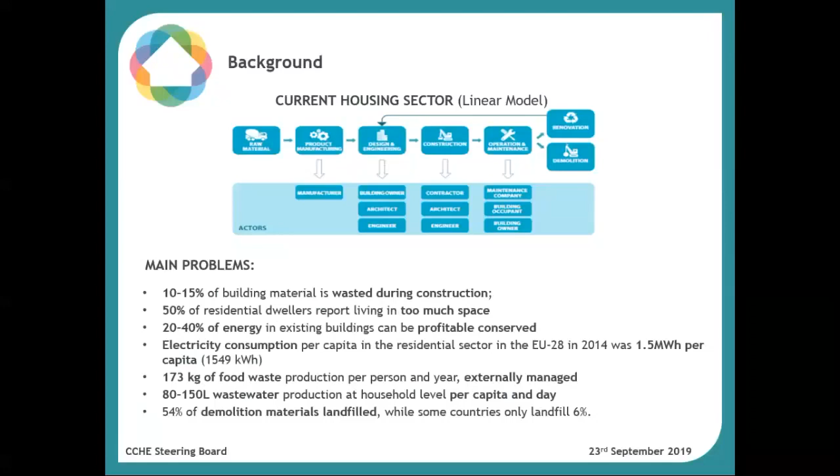For that, HOUSEFUL offers an integrated solution called the HOUSEFUL service, composed of 11 circular solutions co-created by the stakeholders in the current housing value chain.

Co-creation is a very important word in this project because the communication flow goes from one stakeholder to the other in both directions. Co-creation, I think, is the most important part of the project.

The HOUSEFUL service aids the circular management and efficient use of the different vectors such as waste, water, energy, and materials for all the stages of the European buildings' life cycle.

Once these solutions are developed and offered to society as a service, they will be presented as an online software as a service, enabling the replication of these solutions offered to stakeholders as circular economy business opportunities.

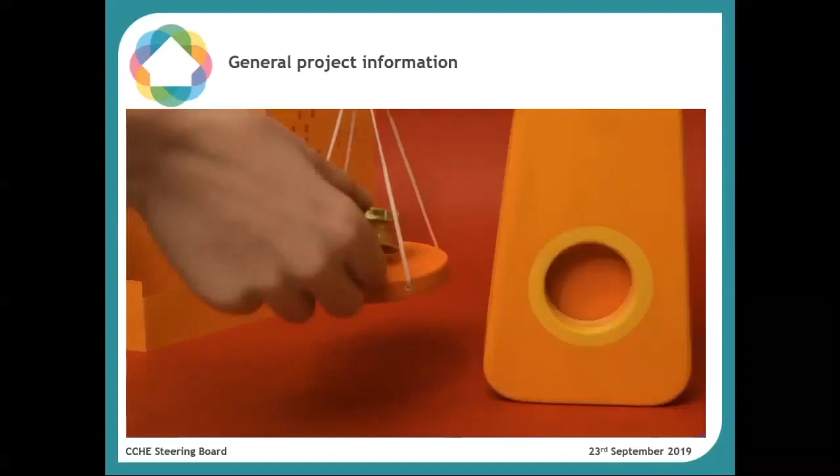Buildings are essential in our lives. They are the places where we live, work, and spend part of our free time. No wonder the housing sector generates 9% of Europe's GDP. However, it is absorbing 50% of Europe's extracted materials, 40% of its available energy, and 30% of its available water, in addition to producing 30% of our total waste and 35% of our greenhouse gas emissions.

Radical actions are needed to preserve the environment by turning the current linear approach to a circular and sustainable one. The EU-funded HOUSEFUL project embraces this challenge by recovering food waste at home level, reducing waste destined to landfills, reusing rain, grey and black water, and fostering the adoption of renewable energy.

Overall, this approach will decrease CO2 emissions by 60%. Imagine? By combining HOUSEFUL's 11 solutions, we'll have the chance to manage our materials, waste, water, and energy in buildings at a circular and holistic level. These will be tested in 4 demo sites, Vienna and nearby Barcelona, and will be adopted later in Europe and beyond to make the housing sector more sustainable, therefore protecting our environment.

Keen to know more about HOUSEFUL? Visit houseful.eu.

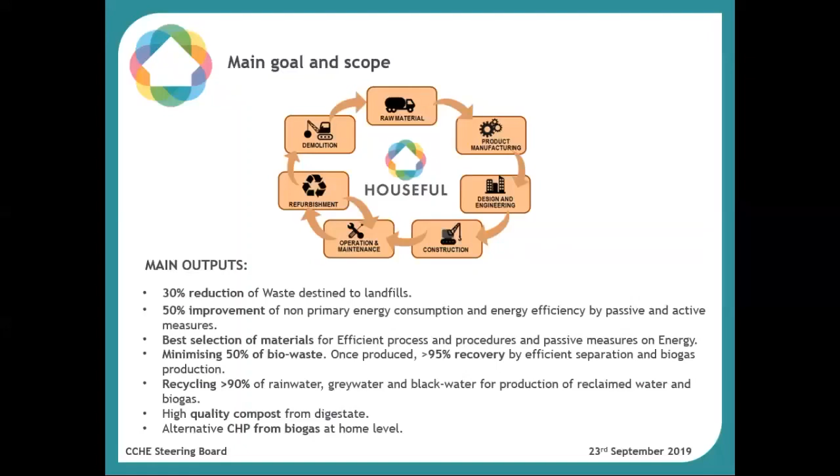Finally, as an output of this project, we expect to obtain a 30% reduction of waste destined to landfills, 50% improvement of non-primary energy consumption and energy efficiency by passive and active measures, a best selection of materials, a high part of recycling of rainwater, grey water, and black water for the production of biogas, high quality compost from digestate, and an alternative to gas that is a CHP from biogas at home level.

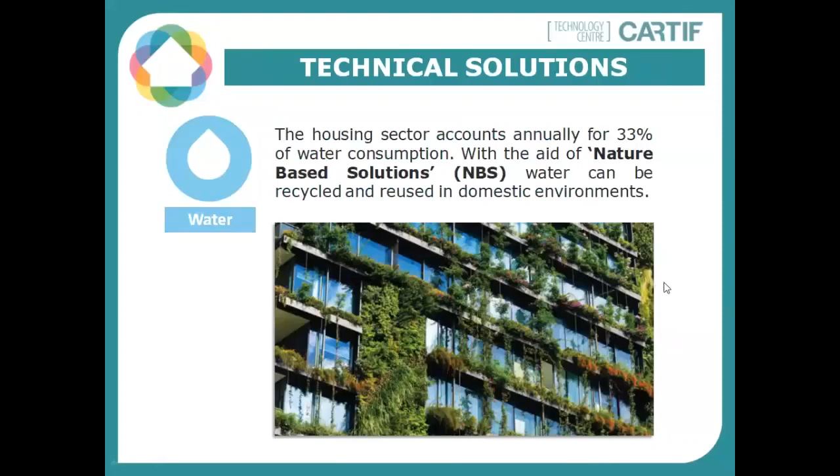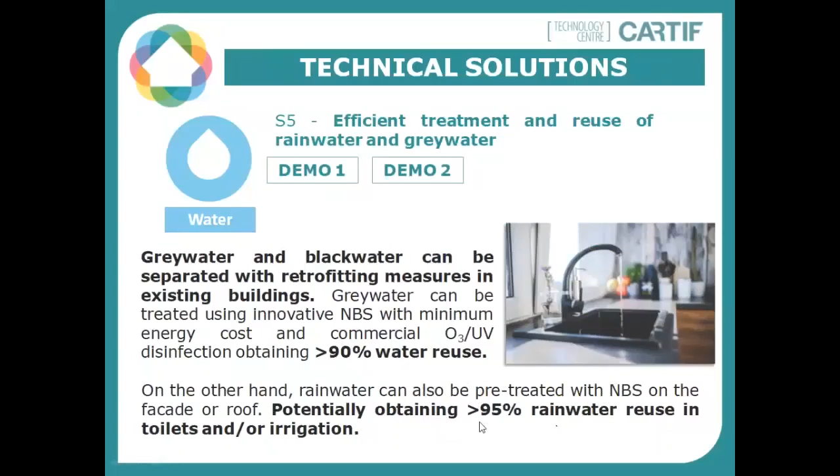In the technical solutions, the first vector is water, based on nature-based solutions for efficient treatment and reuse of rainwater and greywater, to be implemented in Demo 1 and Demo 2, which I'll explain better later. The focus is to obtain over 90% of water reuse and 95% of rainwater reuse for toilets and irrigation of the building gardens.

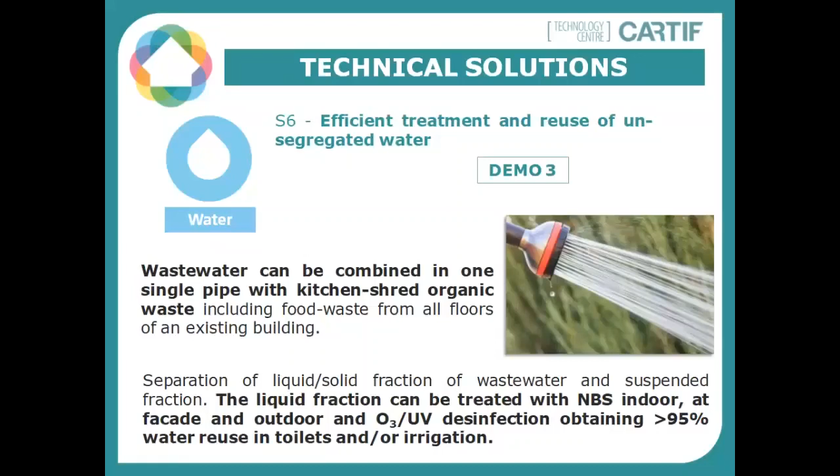Solution 6 will be implemented in Demo 3 and includes combining wastewater in a single pipe with kitchen-shred organic waste. The liquid fraction will be treated with nature-based solutions indoors, at facade, and outdoors, plus UV disinfection, obtaining over 95% water reuse again for toilets or garden irrigation.

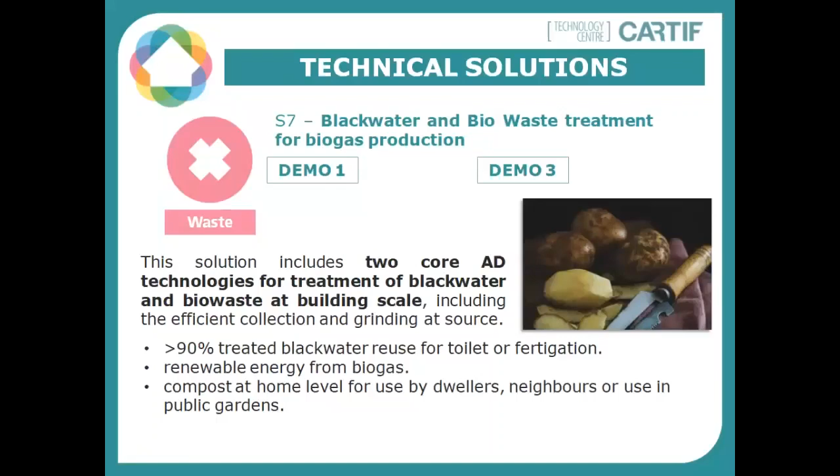The waste vector, where we are probably most focused, has several solutions. The first is black water and bio-waste treatment for biogas production. We've made a recent change here, as CARTIF is upgrading this biogas to produce electricity or heat. This solution will be implemented in Demo 1 and Demo 3, achieving over 90% treated water reuse for toilets and fertigation, renewable energy from biogas, and compost at home level for residents and neighbors or use in public gardens.

Solution 8 is a high quality fertilizer and compost of local origin, implemented in Demo 1 and Demo 3. It uses treated black water as compost for local gardening. The best model for this is a process collaborated with local and regional stakeholders to amplify the use of this waste.

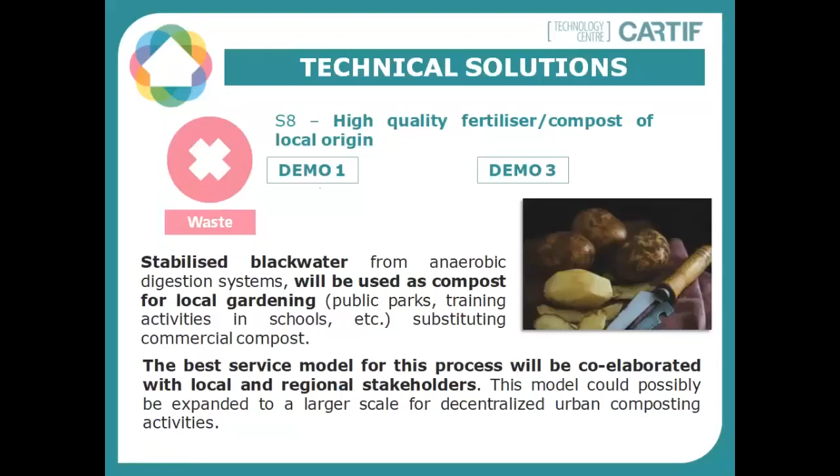The last vector is energy. At European level we have very high consumption of available energy, so HOUSEFUL proposes some solutions. The first is to improve energy efficiency through active and passive solutions, implemented in Demo 1, Demo 2, and Demo 3.

This contributes to creating nearly zero energy buildings, NZEB, as it's commonly called nowadays, which will reduce the energy bill for residents and neighbors of the building. Solution 11 will guarantee energy saving and production in buildings, focusing on the use of solar thermal and photovoltaic systems, implemented in Demo 1, 3, and 4.

Now I'll give a brief explanation of the technical solutions implemented in each demo. Demo 1, as I said before, will have nature-based solutions that pre-treat the rainwater, which will later be hygienized by an ozone and UV system and used for irrigation or in the toilets. The indoor green wall in this demo site treats the greywater produced on its floors, and the bio-waste and black water will be mixed in one pipe.

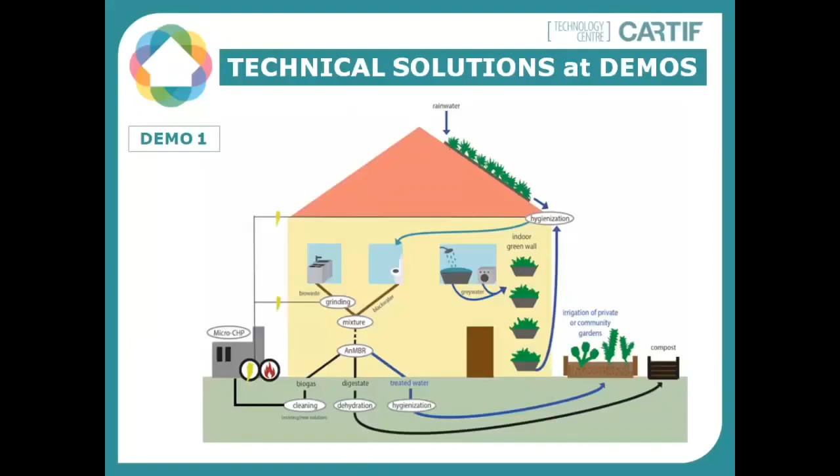In Demo 2 we have fewer technical solutions than in Demo 1, but we will pre-treat the rainwater with nature-based solutions. Later this water is sanitized with an ozone and UV system, and used for the toilets on each floor of the demo, while the greywater will be treated by the green wall nature-based solution.

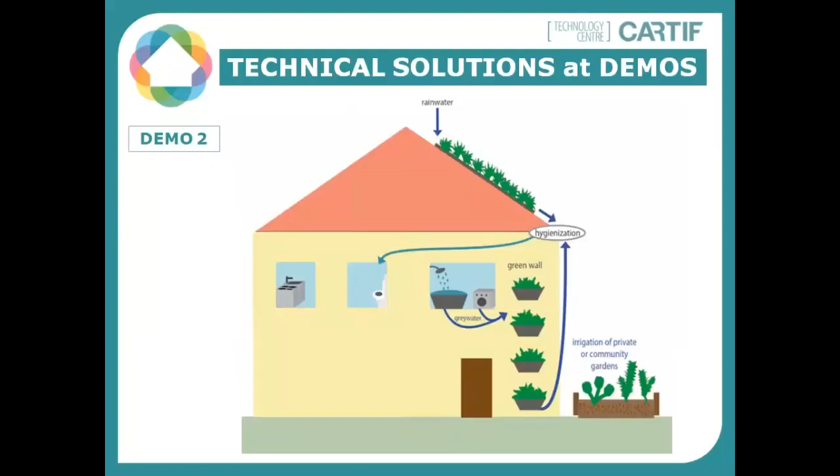And the last demo that has a big implementation of technical solutions will treat the rainwater, as with the other demos, and have organic waste and kitchen waste from neighbors that will be digested in a reactor under anaerobic conditions to produce biogas. We will upgrade this biogas to biomethane that will be introduced in a micro CHP, as in demo 1, and we will produce electricity and heat for the demo.

And in this demo, we have another technical solution that is air treatment, which we haven't explained before, but this is implemented through plants in the nature-based solutions.

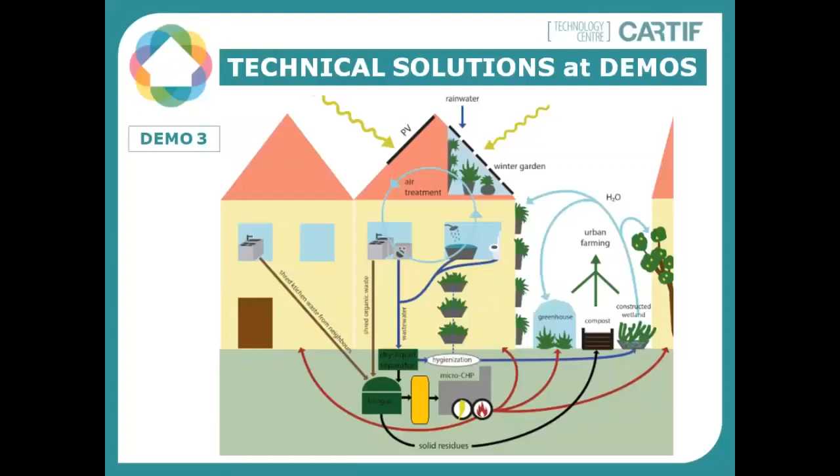And the last one is the wastewater that we conduct to the dry liquid separator. The liquid will be treated and used for irrigation, and the solid fraction will go to the biogas system.

Anything more? Thank you for attending the meeting, and this is all from CARTIF's side. Thank you, Dolores Hidalgo and Juan Castro.